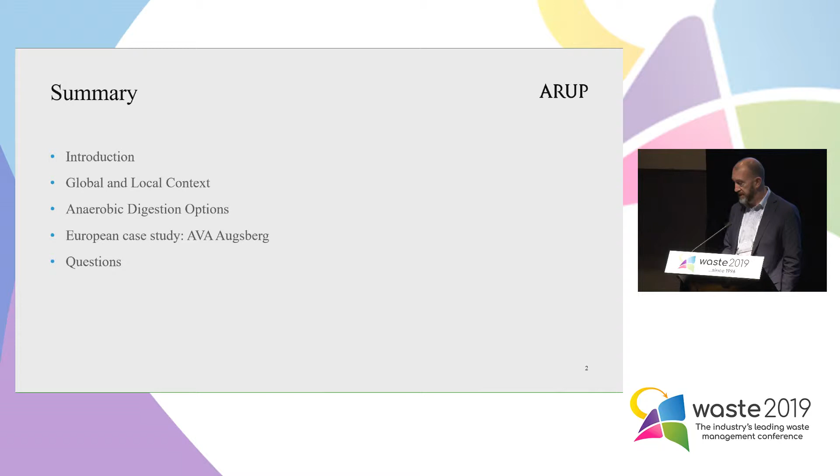So I'm going to go through a little bit of an overview of Arup, who we are, global and local context in terms of organic processing, and then I want to talk about anaerobic digestion in particular. A European case study - we were lucky enough to go and visit a site in southern Germany last year, and I guess just to share some of the insights from that visit, and then any questions if you have them.

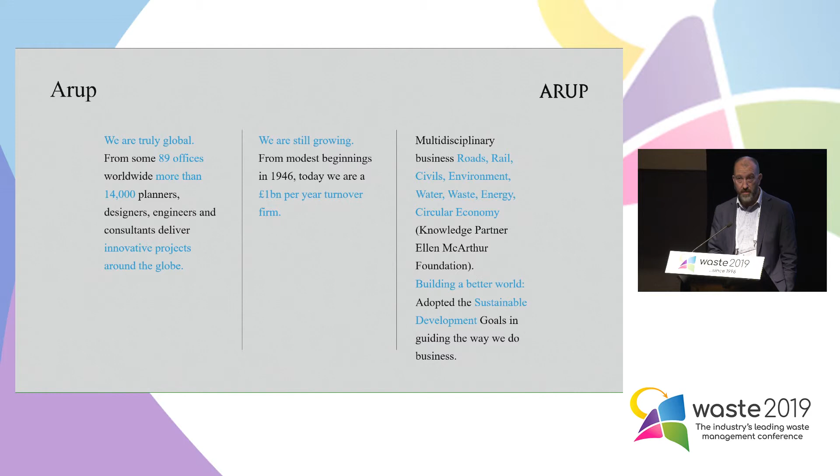So a little bit about us. We're a global company. We've got nearly 90 offices right around the world, 14,000 planners, designers, engineers. I work in the Environment and Resources group. We're a fairly diverse group within Arup - energy, water, waste, which is the area that I'm in, resource recovery. But we also do large road building projects, a lot of big infrastructure, roads, rail, maritime, etc.

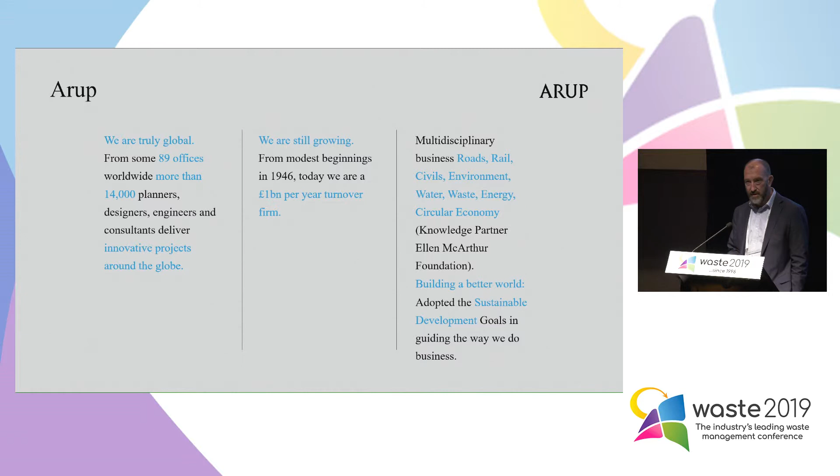Importantly, Arup is very proud to be the knowledge partner for the Ellen MacArthur Foundation. That's a big part of our business. And Arup as a business has also adopted the Sustainable Development Goals, and we've got that in our constitution. We try to live that in the way that we do business.

So, a bit of a global context. A huge amount of organic waste is produced in the world globally - 1.3 billion tonnes it's estimated, which is equal to a third of all the food that's produced annually, which is just a monstrous figure really when you think about it. So it's a huge problem, but it's a big opportunity in terms of being able to deal with that organic waste better and the opportunities for doing that.

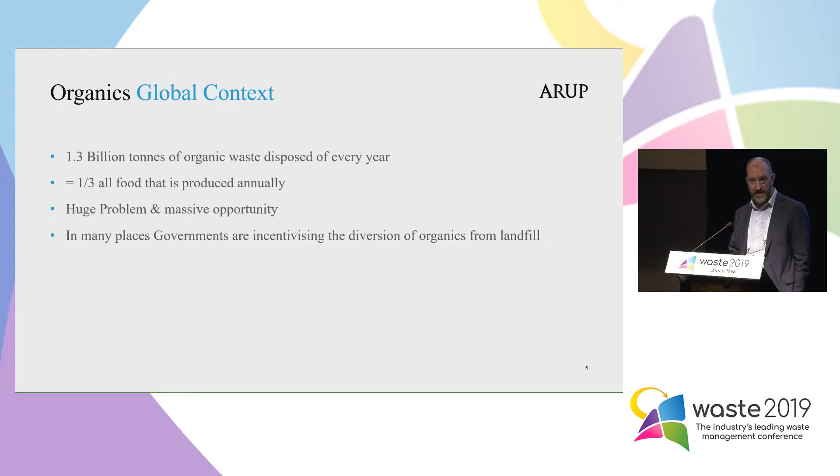And in many places around the world, we see governments that are actively putting policies in to encourage the recovery of organics.

Some of the options for recovery of organics: one is for the mixed waste, the MBT. The other two are for source segregated waste - these are just two, obviously, but the main ones: composting of food and green, or FOGO together, and anaerobic digestion of, again, food and green, or FOGO, together.

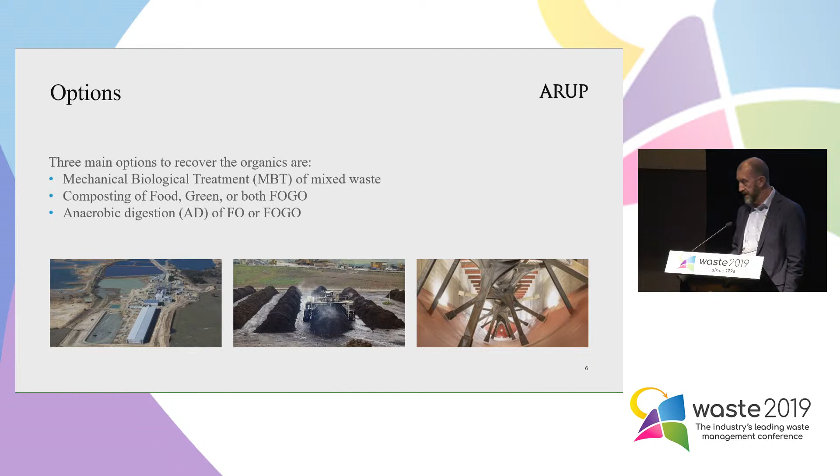In terms of New South Wales, there's been a significant investment in MBT facilities, and we heard from Rob earlier, over the last decade. Late last year, the EPA withdrew the exemption for the application of MWOO, or Mixed Waste Organic Output. The reasons given for that were that there was limited agricultural or soil benefit, and there was a concern over physical contamination and glass.

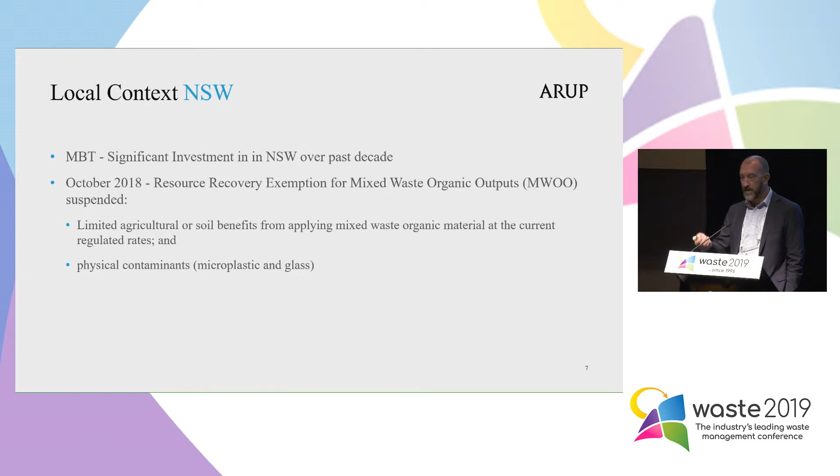So I'm not here to really debate the whys and wherefores of MBT or otherwise, but obviously it's not clear what that outcome will be in terms of EPA's decision. But there is a closer spotlight on other ways of trying to use the organics in a better way, and we definitely - there's been a lot of interest from a lot of our clients at Arup: can we do anaerobic digestion? Can we compost? What can we do?

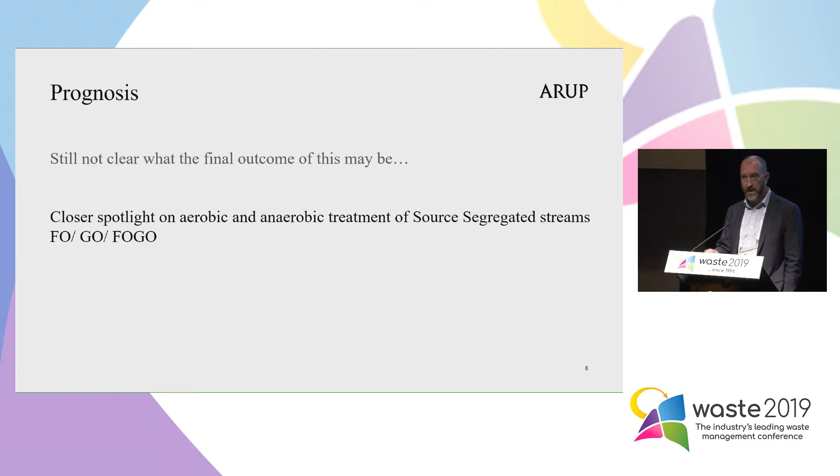So anaerobic digestion is simply bacteria, bugs, breaking down the organic material to release the embodied energy in the organics and produce methane. Potentially that can either be purified and go into the grid, or it can be converted to electricity.

Various configurations - batch and continuous processes. You can have a mesophilic or thermophilic process, which is just different bugs operating at different temperature ranges. High or low proportion of solids - two main types: dry, not really dry, but dry-ish, and liquid. Dry and wet processes, single stage, multi-stage, etc. So there are a number of ways in which it can be done.

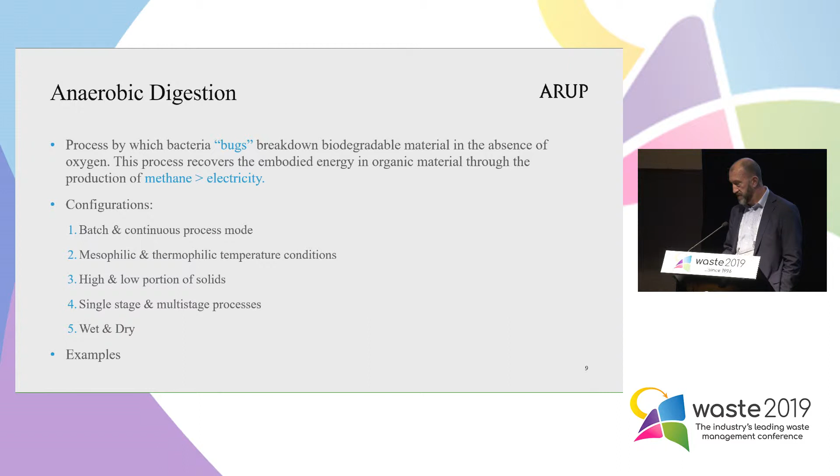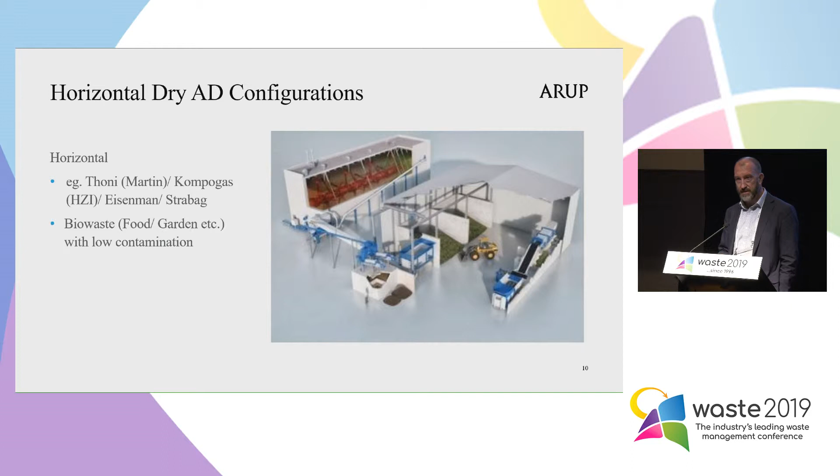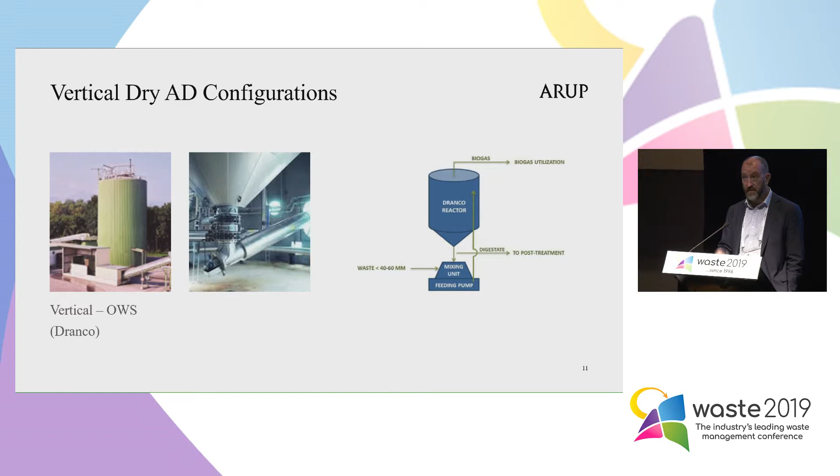Vertical system - this is OWS using the Dranco system. It's still a dry system, but it's just a vertical configuration. Anecdotally, we understand that there are some problems with blockages in these systems, but with all of these, it's down to operation, it's down to preparation of feedstock, etc. So there are pros and cons for each. I think one of the stated advantages of the vertical system is that there's no physical mixing, so you get away from maintenance issues with paddles, etc.

Wet anaerobic digestion, the best case of that is probably the Earthpower facility, jointly owned by Veolia and Cleanaway. They use a BTA waste pulper.

The food waste is tipped, there's no green waste in this system. Food waste is tipped into a pit. It then goes into the BTA waste pulper, which is a big hydro mixer, basically adds water, and produces a sludge. It goes through a grit removal system and then subsequently into an anaerobic digester. So it's a liquid system.

The outputs from that are biogas, and then it produces a prill that can be applied to land with the appropriate exemptions.

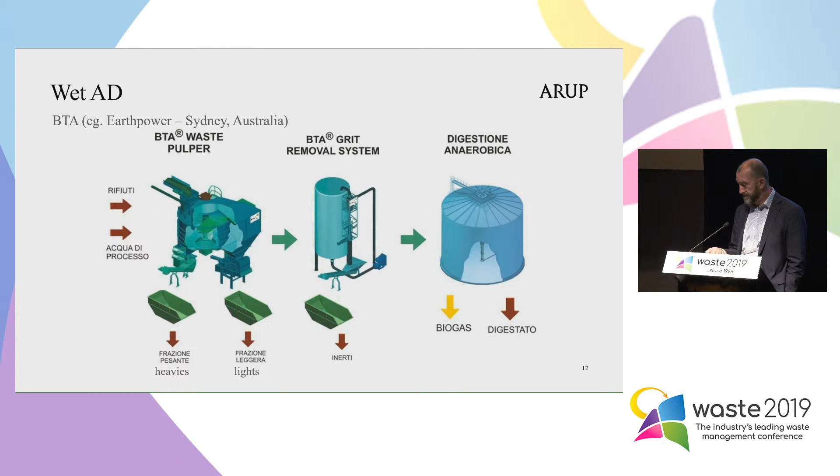The case study I wanted to talk about and focus on was a site north of Munich. I visited that early last year. The facility is provided for the municipality of Augsburg, and it's an integrated waste management facility. So it's not just anaerobic digestion, it's got AD, it's got composting, it's got a waste-to-energy facility. It's a truly integrated system. It's got a MRF as well, which is privately operated and owned, but it operates as a not-for-profit, so it's provided for the residents of Augsburg.

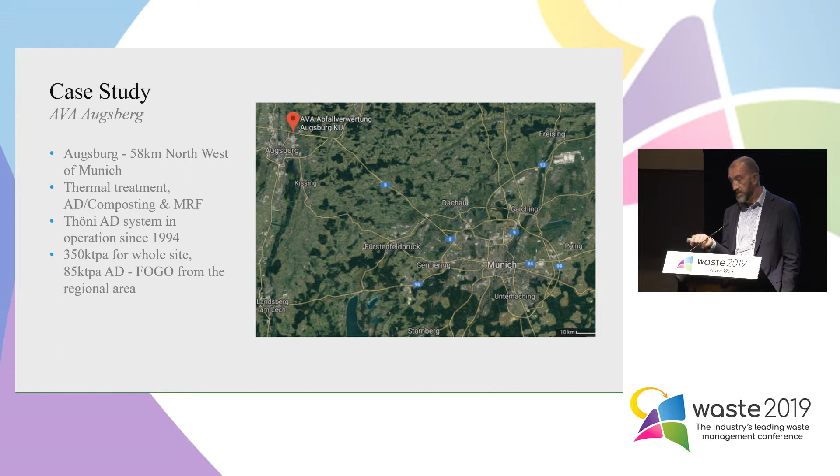They use a Thöni AD system. It's been in operation since '94. There's 350,000 tonnes per annum processed through the whole facility, which is significant. And there's 85,000 tonnes per annum that is processed through the AD facility, which again is significant.

Waste receival, big hall, it's all undercover. That's a Remondis truck, I think it was, tipping on the floor. They get about 24% of the total waste stream at curbside presented as FOGO.

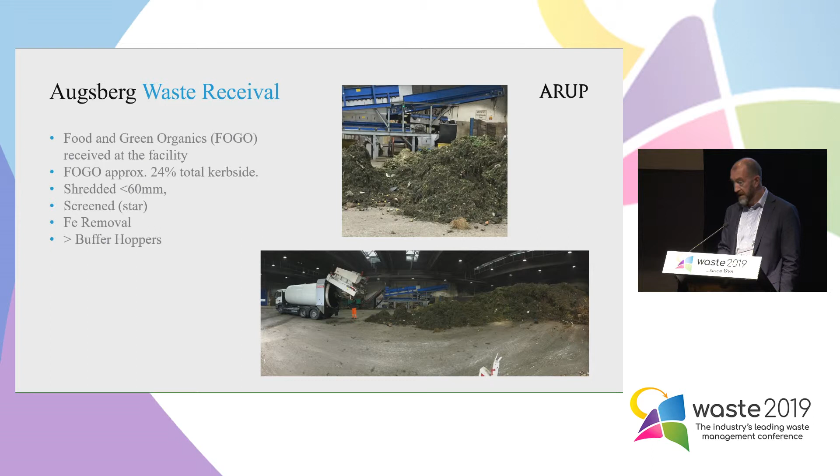I was told that the contamination rates were very low, 1.5% to 3%, depending on the seasonality, but very low. The material's simply shredded down to less than 60 mil. There's a star screen to take out plastics and the like that might have got through at curbside. It's then screened, iron's removed or ferrous materials removed, and then it goes to the buffer hoppers. The buffer hoppers are a really important stage because they take out the seasonality of the waste that's brought into the facility, so that the digesters can be fed at a controlled rate.

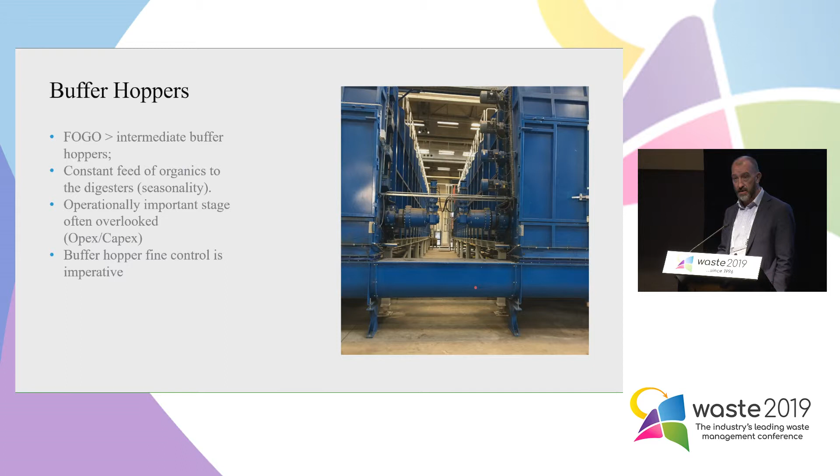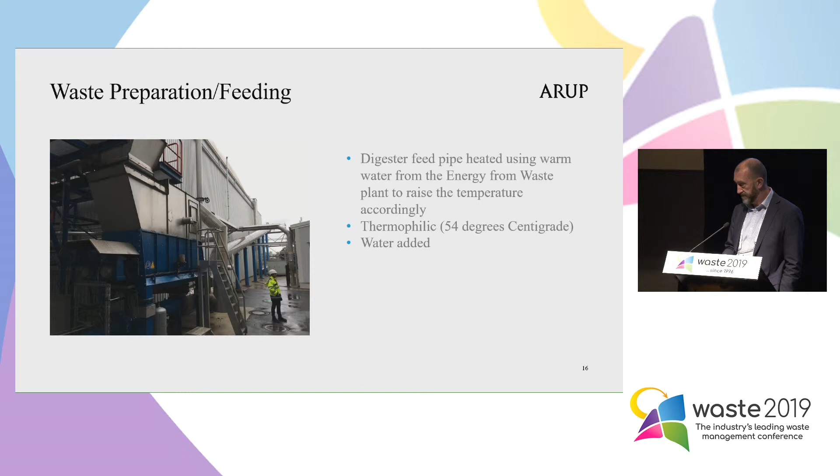So in terms of feeding the digester, difficult to see what's going on in that slide, but the grey building at the top to the right is the digester, and the silver and blue processing unit is where the food and the green that's been shredded is mixed with water. It's heated up to, I think, 54 degrees, and then it's pumped into the digester at the far end of the photograph.

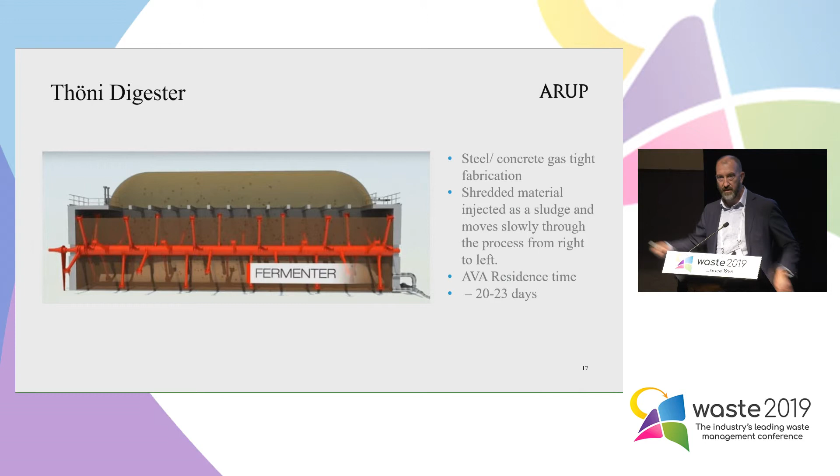The Thöni digesters are really simple, relatively simple design. They can either be steel or concrete, but they're gas-tight structures, obviously, because they're producing methane gas. The shredded material is injected as a sludge, injected at the right side of this picture, moves to the left. The paddles move very, very slowly, and the residence time is between 20 to 23 days. It basically just moves through, filling it at one end and pushing it through the system. So the paddles themselves are not necessarily moving it through, but they agitate the material, they liberate the gas, and they just keep the whole system moving.

That's a shot inside of the digester, obviously before any waste has gone in. I think that was an early publicity shot.

As I said before, the material's heated up to 54 degrees. It's about 30% in terms of moisture content. That particular digester is 33 metres long, and the paddles are rotating very, very slowly at 0.3 revolutions per minute. So it's a very big system. It's got lots of engineering redundancy, which is very important.

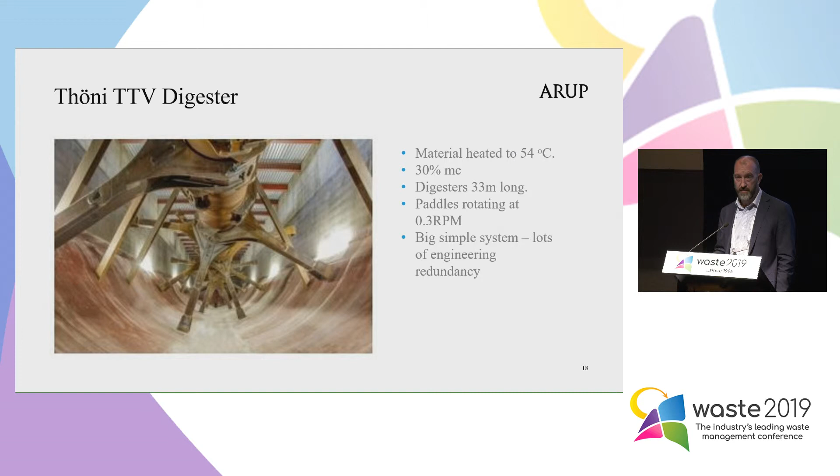The dewatering stage, very simply, separates the liquids from the solids. This is important in terms of the economics of these systems. The liquid is supplied to farmers, who come to the facility and pick up that organic rich liquid to use on their farms. The solids are then taken into the composting system for further processing and supply to the surrounding area.

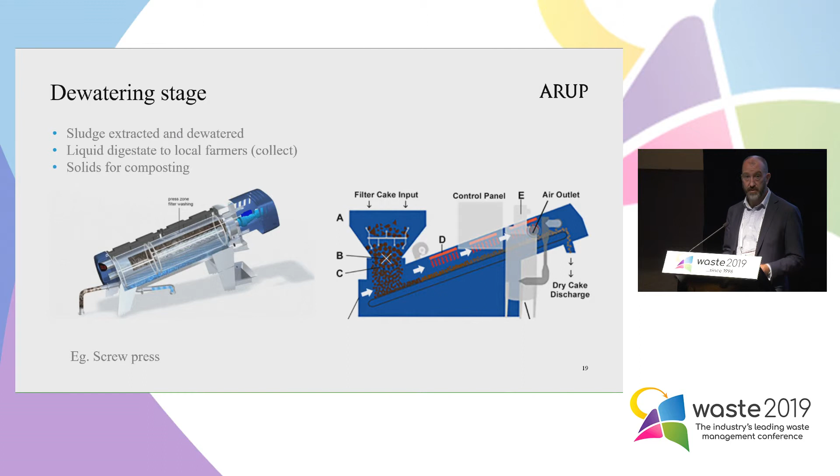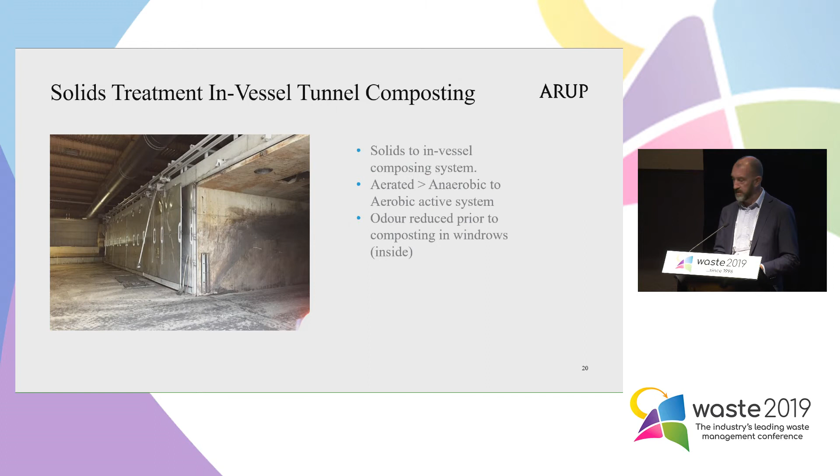It goes into an in-vessel tunnel composting system for about a day, purely to take it from an anaerobic system into an aerobic state, killing off the bacteria that work in the absence of oxygen. Then when it goes into the composting system, they start to get rid of some of those odours, dealing with that issue.

It's composted inside the building using windrow systems with an aerated floor, but they also use compost turners. This is after pasteurisation, which takes 6 to 8 weeks, I think the local regulation for Augsburg, or for Germany.

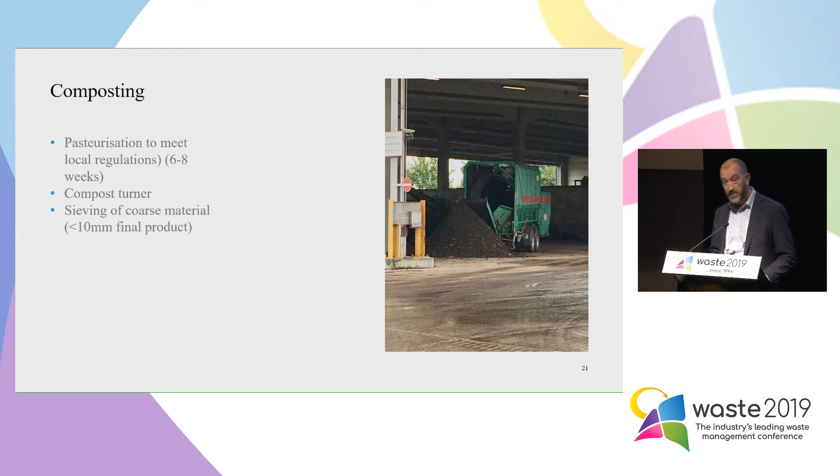It's then sieved and they take out everything that's greater than 10 mil. So that's what the rejects look like.

The energy from waste facility effectively takes the rejects, so there's no cost to them insofar as there's no gate fee, and it's about 12% of the total inputs. Some of it is recycled back, but I think there's about 12% in total when you look at a year's production.

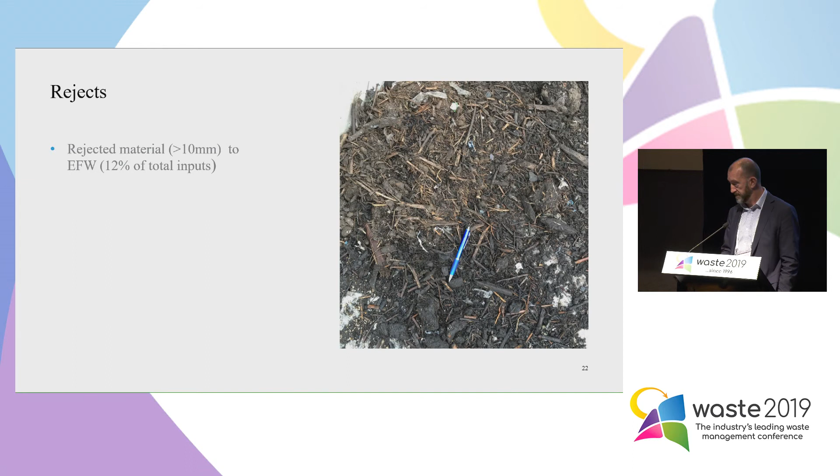So the final compost product was excellent. We didn't see any contamination in the product at all. Obviously that's a function of the quality of the material coming in the front, the contamination rates, education of the local community - a whole raft of measures to get that quality of input material up, and some fairly simple processing at the front to take out that contamination.

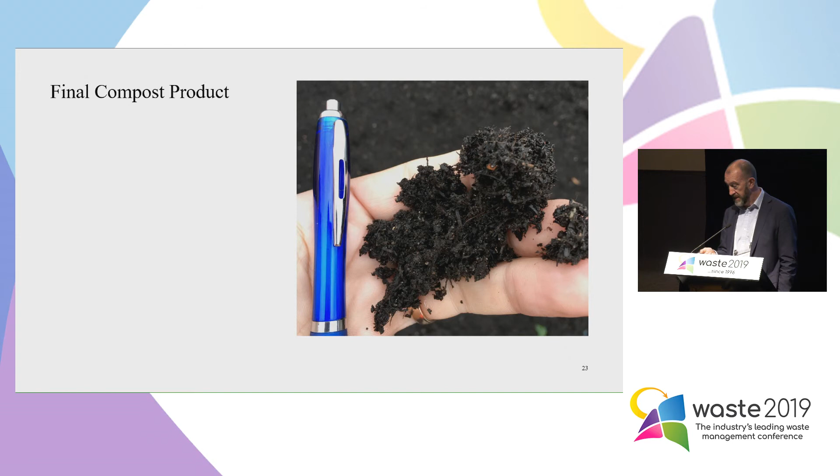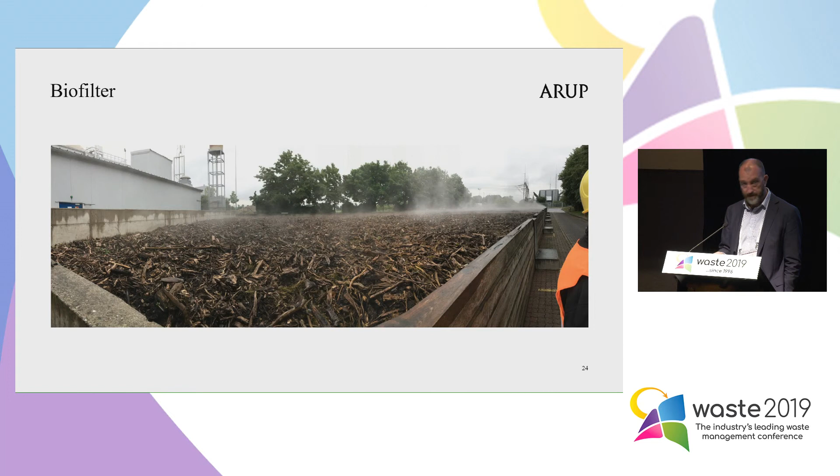So a quick overview of the mass balance. For every 100 tonnes, the cost to them without any profit is about 120 euros a tonne. There's 20 tonnes of compost produced, 30 tonnes of liquid, which goes to local farmers, 12 tonnes of reject, and about 9,000 cubic metres of gas for every 100 tonnes.

So the horizontal system is pretty simple, relatively low maintenance we were told, and it takes advantage of on-site treatment - this whole concept of having waste to energy, anaerobic digestion, and composting all on one site to get the synergies from all of these different industries together. Fantastic.

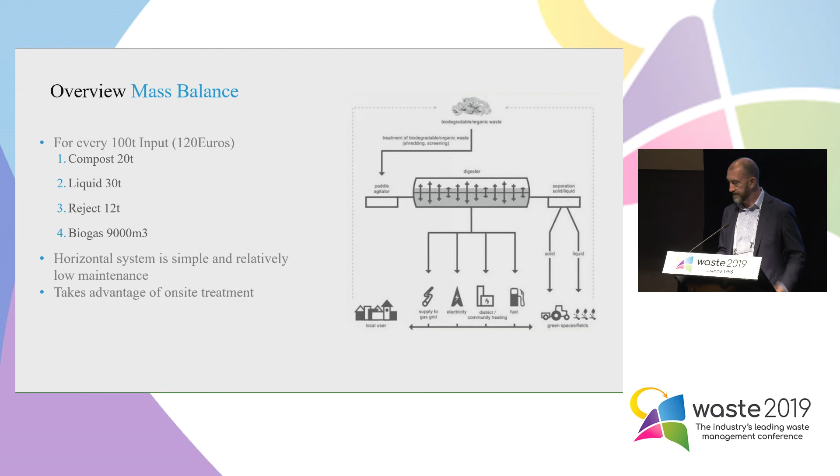So in conclusion, anaerobic digestion is well proven in Europe. It's working in many configurations, and there are many options to look at. Some of those players operate in Australia. Augsburg, as I said before, is a good example of putting all of these technologies together into a single place. There's a huge opportunity if you think about the volume of organics which is not processed - 1.3 billion tonnes globally.

But I don't think the commercial and policy settings are quite there yet in Australia. When you look at Germany and other countries through Europe, they're choosing anaerobic digestion to get the embodied energy back over and above the composting benefits. But they're doing that in the context of additional revenue from the government on electricity produced from organic waste, which is a substantial driver for them. And we don't have that here.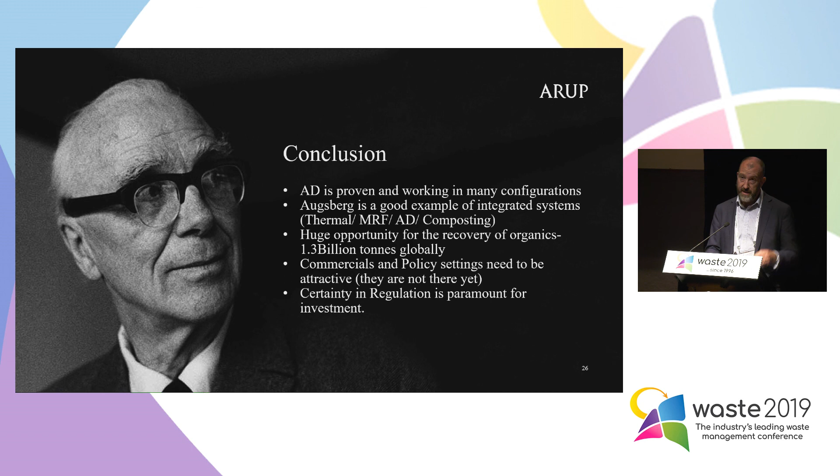I think we need commercials and policy settings if we wanted to drive and encourage some of these technologies to be used in Australia. They're not there yet, and I think the other thing is we need some certainty in terms of regulation - that's absolutely paramount in the context of the last few years. We need some certainty in regulation to encourage investment. Thank you.